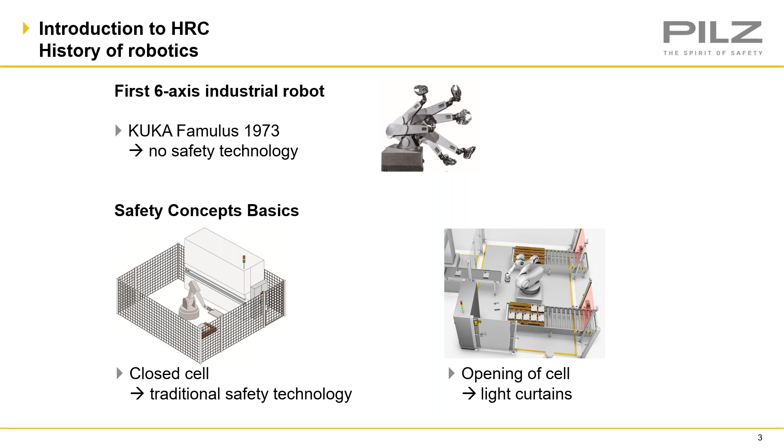So what is human-robot collaboration? The scenario where people and robots occupy the same working area and can come into contact with each other is the first thing which comes to mind. However, it's not the only definition of the term.

HRC covers many operating principles and methods, and Cobots can be used in a large number of different applications. So HRC is not one specific application. It does not describe a specific manufacturer. It can be any manufacturer and various operating principles or methods.

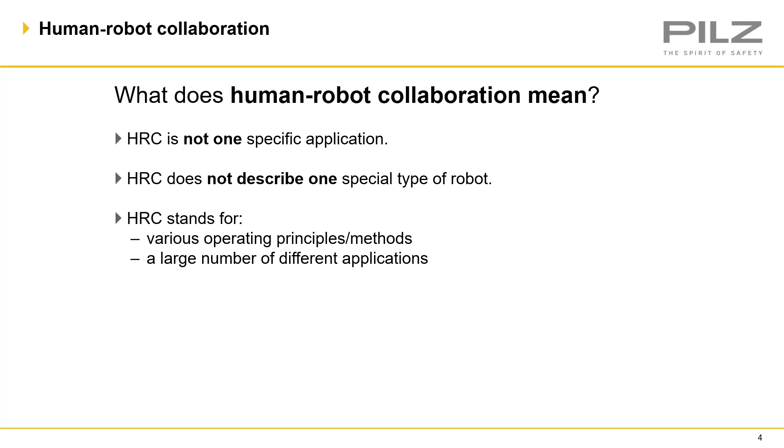So what is the meaning of Cobot? A Cobot is a robot capable of collaborative applications. You may be able to initially identify them as they look very different externally, as they're designed with no sharp edges or trapping points between the axis movements. And generally they're smaller in size due to only being practical in lower payload applications, and this is due to the force and pressure measurement allowances that we'll come on to later.

But it's inside the Cobot where the big differences are. They have inbuilt sensing capabilities and intelligent safety functions, and this is how they detect these collisions.

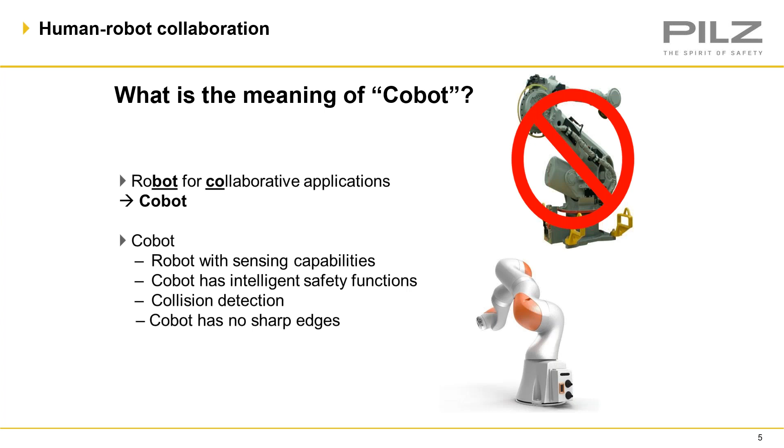So when deploying a Cobot into an industrial application, you are making or completing a machine and therefore required to follow the UKCA or CE conformity assessment procedure, depending on which application you're doing. So to do this, you must comply with the HSRs, and as per the Machinery Directive or the Supply Machinery Safety Regs as of this year, you carry out a 12100 machinery-based risk assessment.

And for those that don't know, ISO 12100 is the only A standard within the pyramid of standards under the Machinery Directive or the Supply Machinery Safety Regs. So within this, you will need to apply the C standard as well, 10218 Part 2.

And using Annex A of this standard, there's a list of common hazards. But also particular attention needs to be given to Chapter 5 and the use of the 4 methods, and we'll cover this in more detail later in the presentation.

But as well as the C standard, there's other applicable B standards. So to name a few, you'll be looking at 13849 Part 1 for safe parts of the control system, 13855 positioning of safeguards, 13857 for safety distances and the calculations within this.

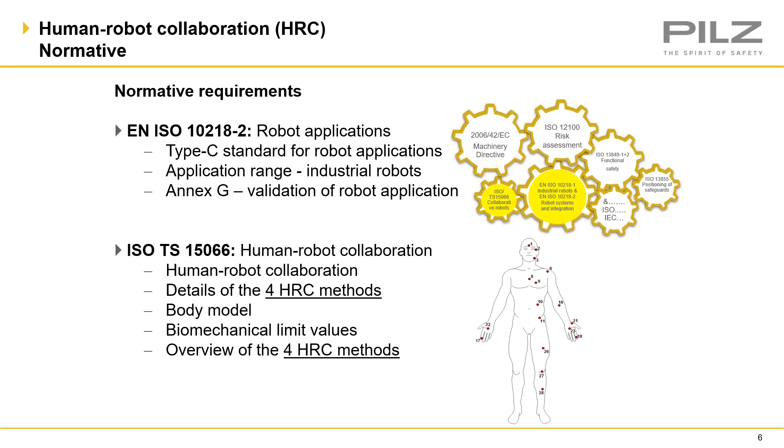When you're validating the application, you'll be using 13849 Part 2, and in conjunction again with 10218 Part 2. And Annex G of 10218 contains a list of more than 200 points to give guidance on the requirements for the validation of the application.

So there was a technical specification, TS 15066, created for HRC. And although it is only a technical specification and not a standard, it follows the usual format of a standard, and it's split into 7 sections.

The format would be 1.1, the scope, so this is detailing what it covers. Section 2 will be reference to other standards or norms, as they're called, and in this, it references 10218 Part 2.

Section 3 is your index or glossary, so it gives you definitions of the terms that might be in there if you need any clarification on them.

Sections 4 and 5, these are the technical details for design and hazard identification, and also other requirements. So in this case, it will say that the performance level requirement is a minimum of PLD Cat 3 for the safe-rated parts of the control system.

Section 6 will be verification and validation requirements, and 7 is just information for use. The annexes in the back will contain informative information, so that's information to help you, or norms or normatives, which are must follow requirements.

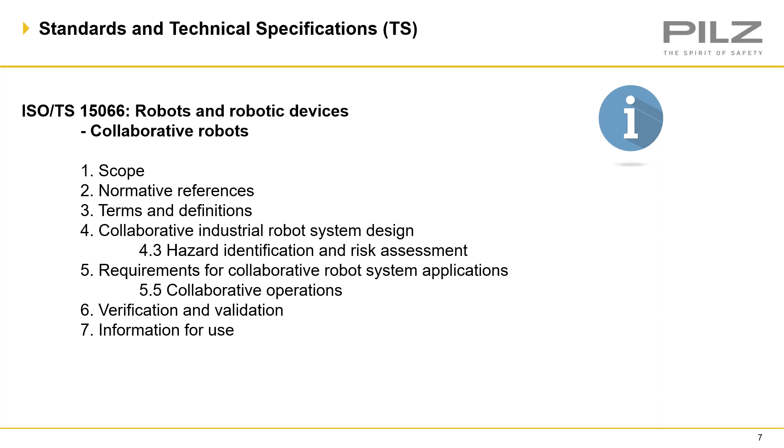Within the standard, it defines a number of spatial parameters, as listed on the slide. Starting with maximum space, this is the unlimited movement of the robot—the maximum reach of the robot and end effector complete with the workpiece. It's the full reach at its maximum extension without any limiting measures.

Then we move on to restricted space. This is where the robot is permitted to move following the implementation of limits, which may be physical mechanical stops, electrical control devices, or, more common today with advanced robots, safety rated software. Guarding is actually allowed to be classed as a restricted spatial limit, but it's not common, and we'll cover more detail on that in the next slide.

Then there's the operating space. This is where the robot will maneuver to perform the task it's being designed and deployed to execute. It is not, as the previous point, restricted to this space—it can go out of it, but this is just where it's expected to operate by design.

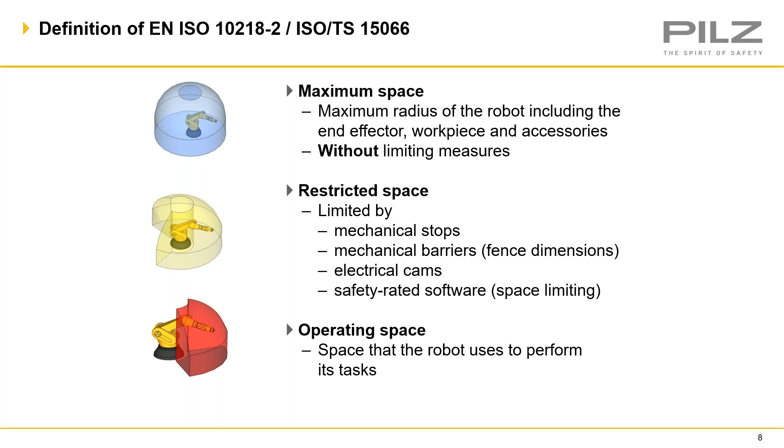So the safeguarded area. The safeguarded area is ideally outside of the restricted space to avoid the robot coming into contact with the guards. But if the guard is deemed to form part of the spatial limit, then it will need to comply with section 5.4.3 of 10218 Part 2. The results of the risk assessment should be used to determine the requirements for guard design, strength, and deflection.

There are 4 notes in this section, and particularly relevant is note 4, where it says using a perimeter guard as a limiting device is normally practical only when robots cannot cause hazardous deformations to the guard. So basically, the guard must be capable of withstanding the force of the robot. When you think about some of the forces generated by these robots, it would need to be a pretty strong guard—so it's probably not practical to do this.

And finally, the collaborative space. This is within the operating space, and this is where human and robot contact can occur, where both will interact and work together to carry out the tasks it's been designed for. This is also where the validation tests will be performed, which we'll cover later in the broadcast.

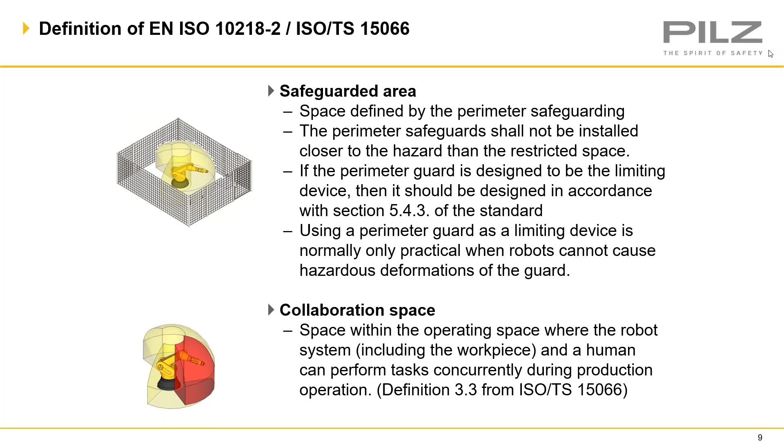So 10218. Just to note to start with, 10218 Part 1 is not something we're going to be concerned with so much today—that's for the robot itself, and is therefore designed for the manufacturer, so the Kukas, Fanucs, Yaskawas of this world. What we're going to be looking at is Part 2, where the responsibility for the complete machine application lies, and it's generally for the integrators.

Particular attention should be given to Chapter 5 for the required performance level, as mentioned before. Some of the other key information is from 5.2.2, for instance, where it says the minimum requirements of the safety-related parts of the control system is PLd Cat 3. But 5.2.3 says this isn't limiting—a higher performance level could be required if the risk assessment deems it necessary, so you may need PLe. Also, through risk assessment, you may be able to justify that a lower performance level is required, or that you can't meet the requirements, especially if the robot can't meet this.

I know some of the early cobots released only achieved PLd Cat 2 for collision detection, but again, you've got to justify this and document it in your risk assessment. Section 5.11 also discusses collaborative robots and the use of the 4 methods, but it doesn't give guidance on force and pressure limits, and it makes reference to 15066. We'll come on to the 4 collaborative methods in more detail.

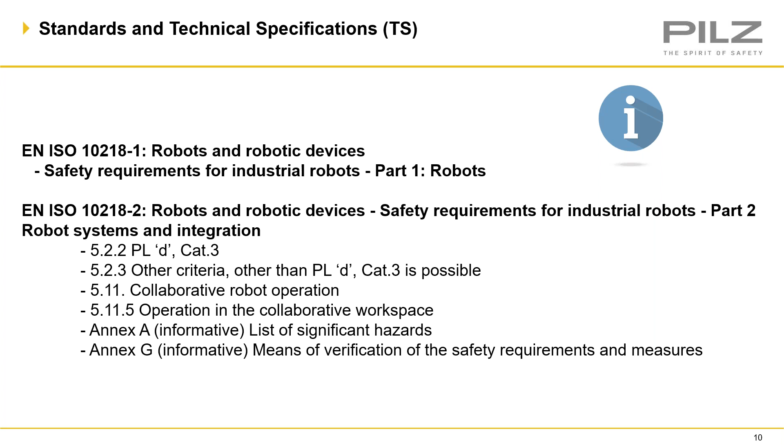For those that aren't aware of how we get to performance levels, this is the risk graph from 13849. If you follow the lines down, you'll see where we get to D. So to be at D, you must have selected S2, which is a severe injury.

And these are mostly going to occur if you come into contact with a robot. So if you've selected a severe injury, you only need to say there's either a high frequency of exposure or the possibility of avoidance is scarcely possible, then you will end up at D. And as we said previously, if you deem both to be the case, then you will end up at E. So it's not out the realms of possibility that that's going to be the case.

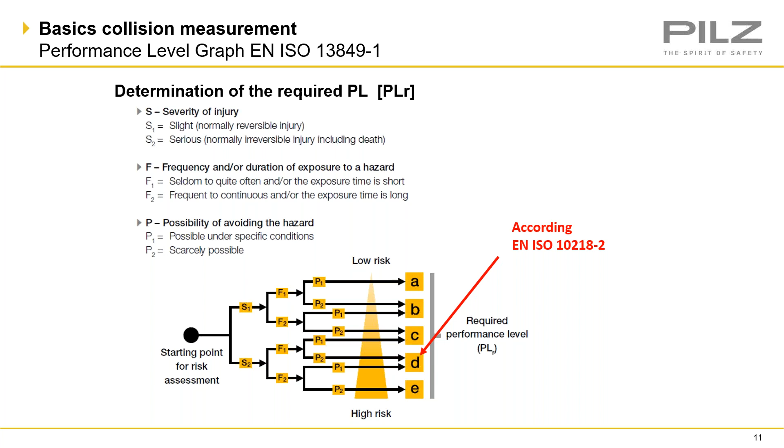So that's the performance level bit. The category of the architecture, as you can see here, we have 4 categories, 1, 2, 3, and 4, and we're going to be looking at Cat 3. So this gives you a single fault tolerance, meaning a single fault cannot lead to the loss of the safety function. So it offers you a dual channel architecture, which gives you redundancy.

Some may argue that you can achieve PLD with Cat 2 architecture, and in some ways that does give you redundancy, but it only actually happens following the detection of a fault and a secondary reaction. So this will mean there'll be slower reaction times associated with parts of the control system.

So if you were to use this in any application, even using electrosensitive protective equipment, light curtains, as we've got in our diagram, then to truly calculate the stopping time of the machine, you would need to introduce the fault so that the system can detect it, process that detection, and then send out the reaction to stop the upstream contactor or the secondary device which would be used to kill the power. And that would have to be used in the calculation in 13855. So the formula S equals K times T plus C, and that would be your T part of that.

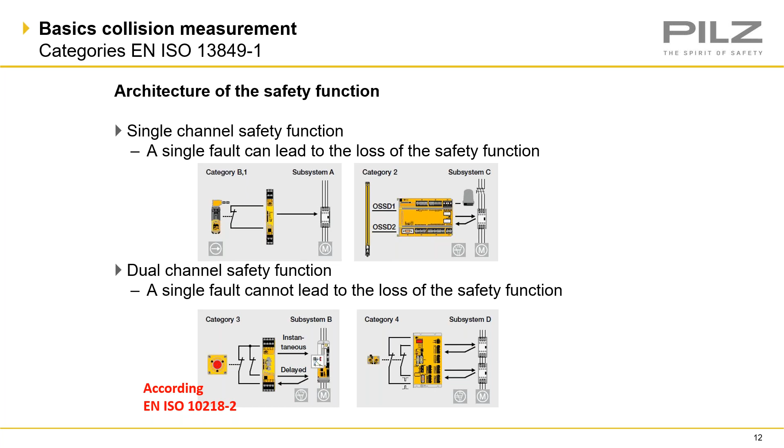As we said, we'll come on to the 4 methods as well. Section 5.5 of TS 15066 discusses the use of the 4 methods for robots to work in collaboration with humans. These are referred to as operations in the TS, but they're also known as methods, so you may hear both terms being used. But the first 3 are traditional in robot applications. It's only method 4 that's really new.

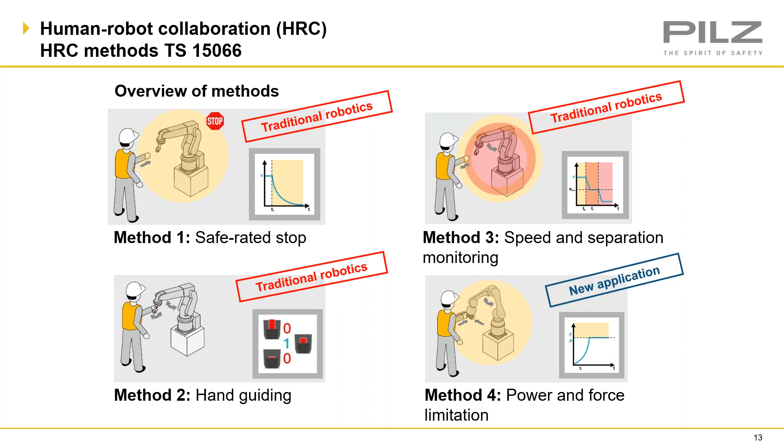So if we cover these methods, number 1, method 1 is safety rated monitored stop. This is where there's no contact allowed with the moving robot, and this is generally achieved by guarding or protective devices. The robot must have come to a safe stop before entry is allowed, and it can be any stop category, 0, 1, or 2. They're all possible, but just depends on the application.

This stop would usually be triggered by guarding or scanners or light curtains, but the scanners or radar may also be used to monitor the collaborative space for occupancy detection, because we need to make sure that it's not going to restart.

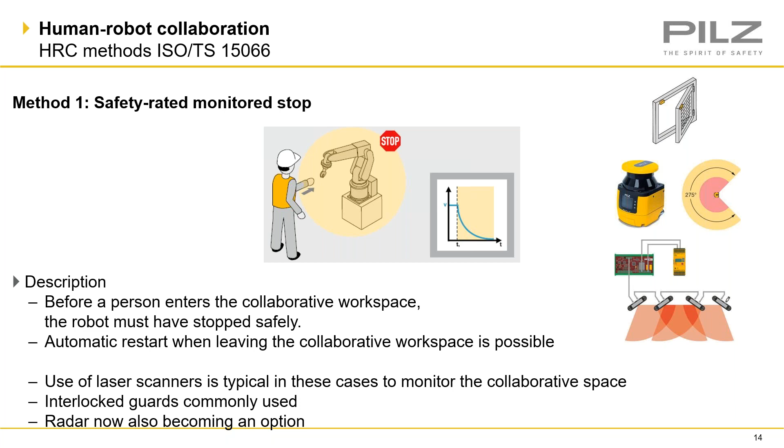Method 2 is hand guiding. So following that safe stop that we've achieved in method 1, you may control the robot by hand, and this would be done by disengaging the brakes. But to disengage the brakes, really, it needs to be done from a 3-position switch, and the use of the 3-position switch is key to allowing the robot to operate through the hand guiding. It should be part of the robot controller. This 3-position, as you can see, is the middle position where it activates it, so if you let go or grip tighter, it won't operate, won't give the OK signal.

So some of the requirements that need to be considered as well, again, the performance level. We've got to think about PLD Cat 3, and safe speed limiting maybe, and the other safety functions of the robot.

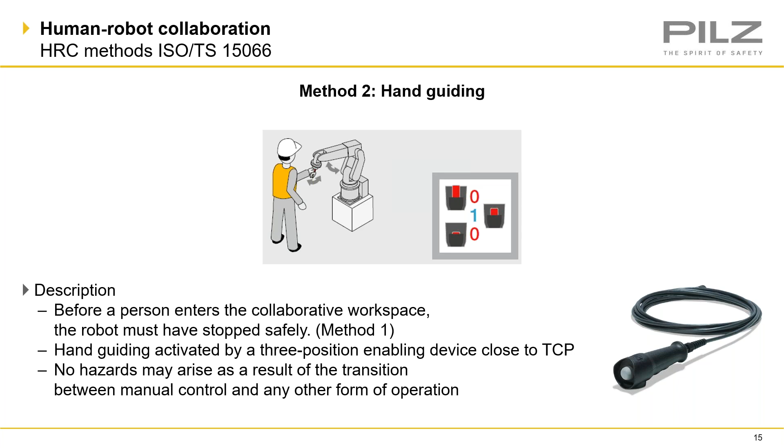Method 3 is the speed and separation. So again, still no contact with a moving robot, but it may be that it's unguarded and the human approach is detected by sensing technology to slow the robot down, maybe in the amber zone. And when you get too close and you enter the red zone, then the stop is required. So you may be looking at scanners, radar, or something like that to carry out these requirements, but only if those devices will achieve performance level D category 3.

And you then have to consider your stop performance, and so you time these stops to make sure that you still can't reach the robot and create an unsafe condition.

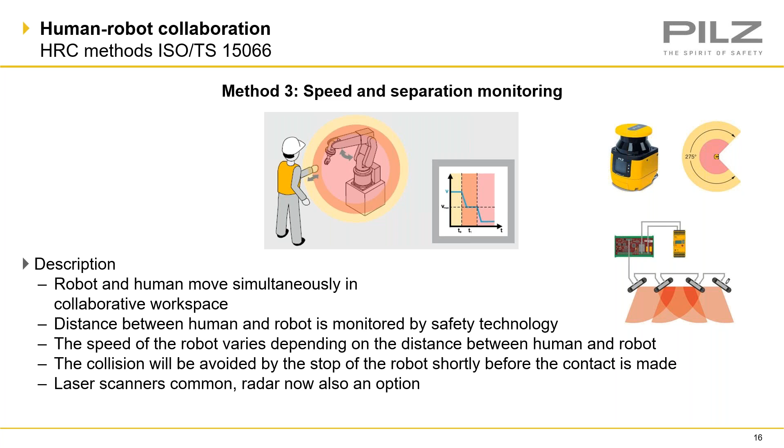So method 4, the new method. It's the first time it's been allowed for the operator and the robot to inhabit the same working space, and contact between them whilst performing duties or performing this task together.

So we have to consider intentional but also unintentional contact. And there are stated thresholds for both force and pressure limits that are detailed in 15066, depending on the body contact region. And these must be validated, and the validation must be performed to prove there's no injuries that are going to occur in this mode, but also documented as well, so there's traceability.

And we cover these 4 methods, and they're not all mutually exclusive, so you don't have to use one or the other. For some method 4 applications where you want to have true interaction with the robot, it might be that due to the speeds required to meet the thresholds in the force and pressure requirements, you can't go fast enough to get your throughput for the application. So it might be like a method 3, method 4 collaboration. So it may be working at full speed, but you detect somebody coming into an area, and then you reduce down to a speed that will allow you to realize these force and pressure limits. So there's ways in which you can get to having collaborative applications that aren't just so black and white.

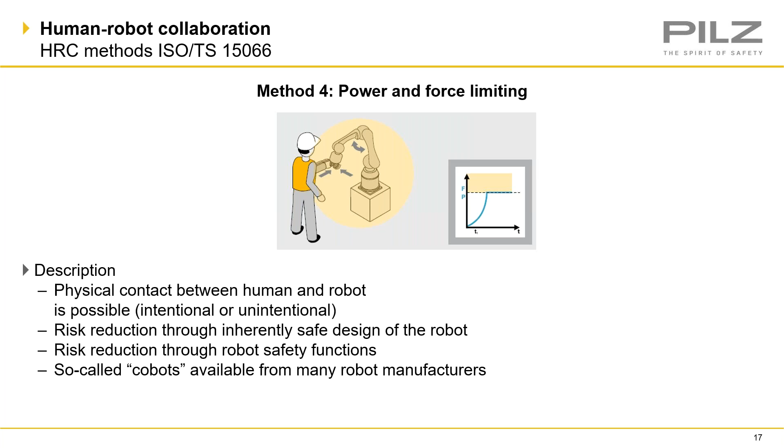So for a safe robot application, there's a special path. And why do we need a special path? Well, all robot applications do, but the validation requirements change, especially with HRC applications.

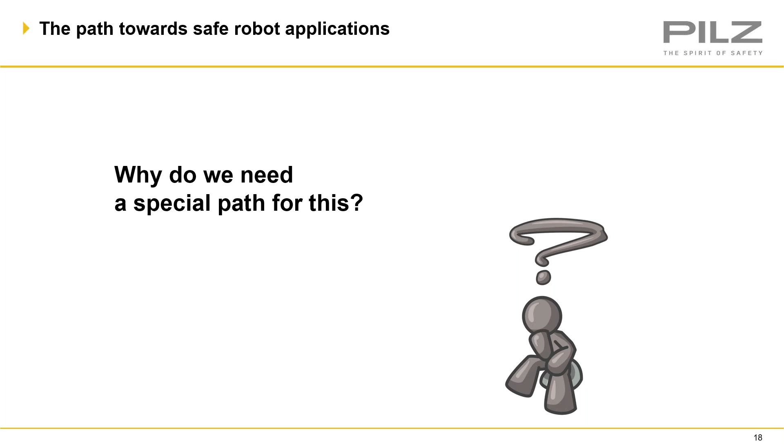As with all machinery installations, you must demonstrate conformity to the law, whether that's the EU directives or the UK regulations. You'll most commonly do this via the application of harmonised, or now under UKCA, designated standards. These standards are guidelines, and it's not mandatory to follow them. However, a lot of the working out has been done for you. They give you guidance, and they give you a presumption of conformity to the directive or regulation.

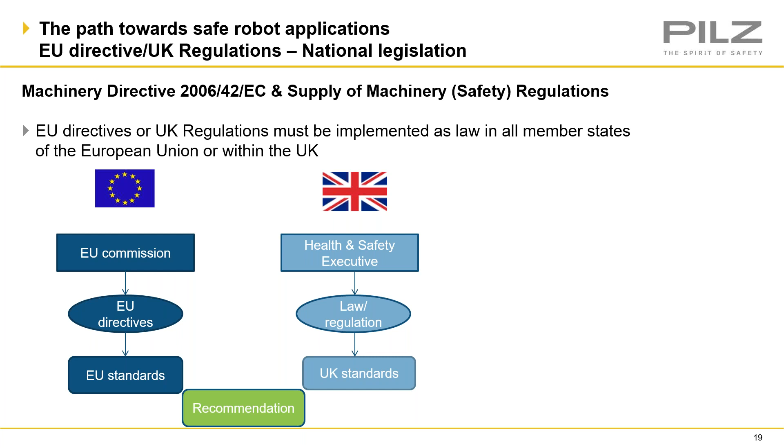And if you don't follow them, you have to demonstrate why what you have done is as good, if not better, and all the working out to prove that. So for me, it's kind of just common sense to follow the standards. Somebody else has already done that work for you.

And whether you're UKCA marking or CE marking your final application, the process at the minute as we stand is currently the same. There's some terminology changes that you have to consider, but things like the EHSRs, the standard numbers are the same. So it's just generally down to terminology changes at the moment.

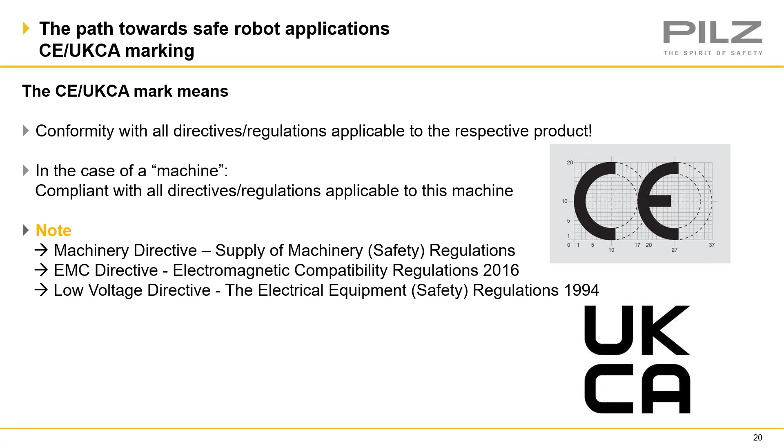So, according to the Machinery Directive or Supply Machinery Safety Regs, a robot is classed as a partly completed machine. This is due to the actual definition of a machine being that it's an assembly of parts, at least one of which moves, which is fitted or intended to be fitted with a drive to perform a specific function. And out of the box, a robot doesn't meet these requirements, as it will not perform a specific task until it's programmed and has an end effector.

And this is why you won't see a CE or UKCA marked robot directly from a manufacturer. This is the integrator will do this.

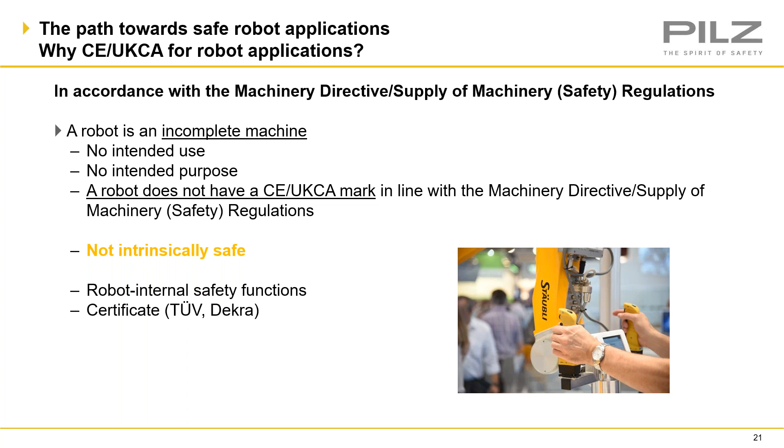So the integrator is concerned with 10218 Part 2 and the complete machine, as we previously mentioned. And this is where they will give it an intended purpose or an intended use, and therefore effectively become the manufacturer. And the manufacturer will hold the responsibility for the safety for the UKCA or CE marking conformity assessment procedure. And within that, producing all the supporting documentation and issuing the CE plate and signing the declaration of conformity.

The only time an integrator wouldn't do this is they appoint somebody else as an authorised representative to carry out these duties. And they will be doing the assessments, etc. Co-sign a declaration of conformity under mandate from the integrator and supplying the CE plate then, featuring both logos.

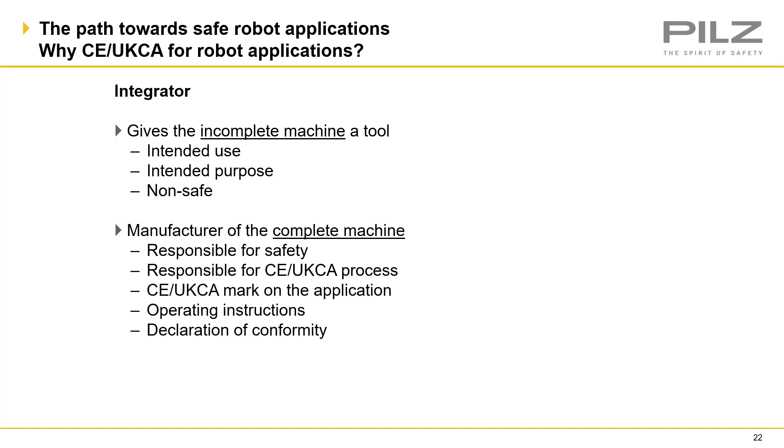Some of you that may have used us for services before may be familiar with the Pilz machinery life cycle. Our normal life cycle would start with a risk assessment before producing a safety concept, and this serves as a basis for the safe design. And then we go on to the safe design, the validation, the verification, etc.

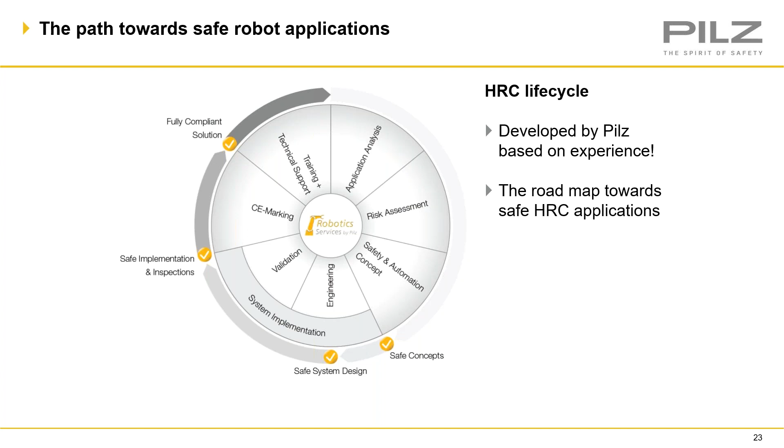But what are the differences with an HRC application? Well, we introduced the application analysis phase, and this is to be done even before purchasing the Cobot, and it should be at the conception stage of the project.

And you want to consider things such as, is it necessary that the application is collaborative? What is the requirement of the application? And what are the materials being handled?

Because we've worked on applications in the past where doing this analysis too late meant that it wasn't possible to make, or financially viable to make, the application collaborative. And it wasn't to do with anything with the programming or any of that. It was just to do with safe design.

There were sharp edges. The robot could have been placed in a different orientation. How it handled the workpiece could have been slightly different. And if it's identified early enough, they could have all been designed out or just designed differently. But it was too far down the line and was not financially viable, so they ended up going with a method 3 application.

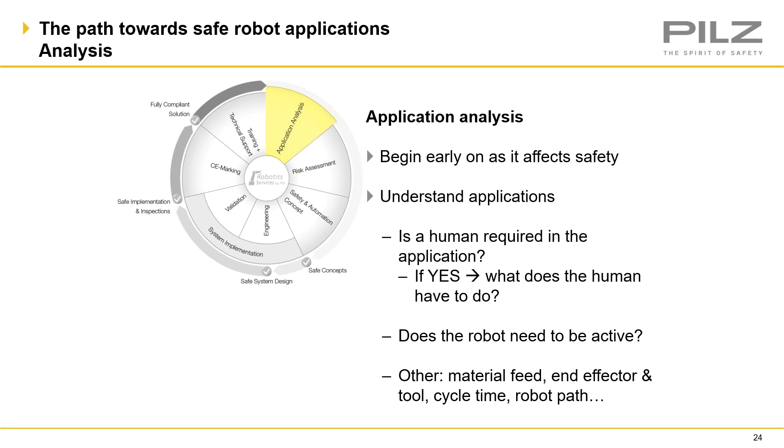So following the analysis, we do a risk assessment, and this is always the basis for any CE marking or any application where you're installing machinery. It's got to be driven by your risk assessment and following the standard 12100. And you'll do the normal things such as looking at the limits, tools, variants, there's operating modes, what's its intended use, any foreseeable misuse, and other activities.

But also think, as with the application I just mentioned, the workpiece has an influence on the hazards. And this is something that needs to be considered early. So if there are sharp or hard edges, how it needs to be twisted or turned or transferred from one place to another, these need to be considered.

But with HRC, even the path that the robot moves and the axis rotations can cause hazards. So you may want to think about making sure that if it's placed on a worktop or near a floor, that there aren't any trapping points between the floor or another object and the axis movements of the robot, and you may move it in a slightly different way, and it will just remove these hazards altogether.

But consideration has to be given as well, and documented, for the other collision types and expected body areas to be involved. You also have to think about an unexpected startup, because when the robot's standing still and people are in there, it's always got to be in a safe stop, but we need to know that it's not going to restart, especially if we're going to be working so closely with the robot in these collaborative applications.

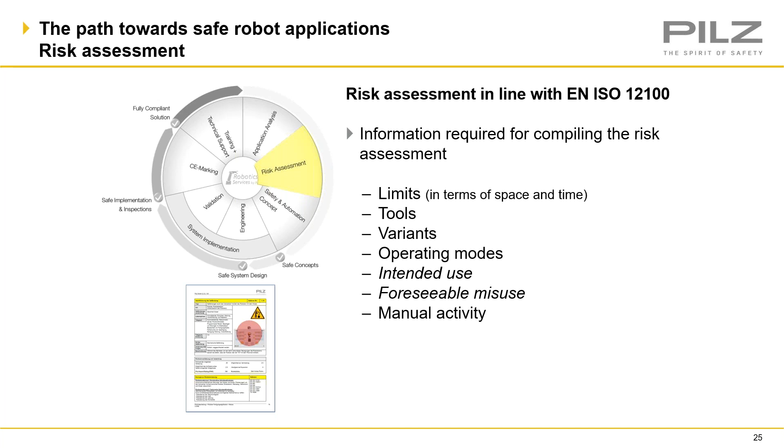So following the analysis and the risk assessment, we'll move on to the safety concept. As I said, this will serve, if we produce them as Pilz, as a product neutral basis design. And we'll utilise the hierarchy of control, the three-step method for the risk reduction. But we'll also consider things such as safe distances, any applicable standards, safety-related control functions, sequencing, etc. And this is how we will reduce these risks down to the manageable risk levels or acceptable risk levels.

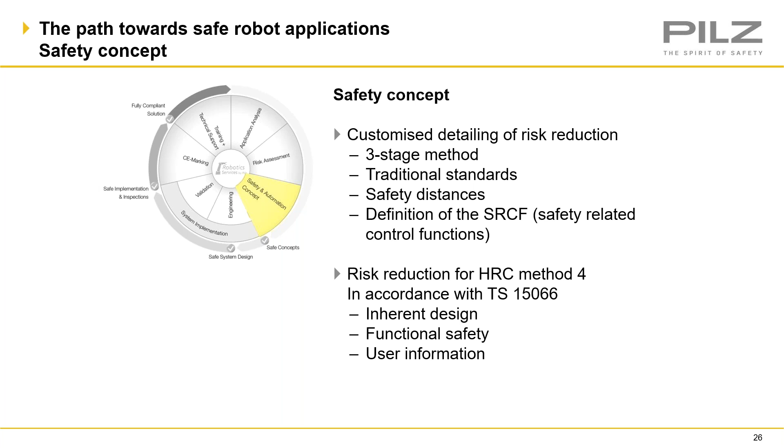So for those that don't know the three-step process, the first step, and again, this isn't just for robotics, it's for any application, is inherent safe design. So can we design these hazards out? As we said before, taking out sharp edges, moving the robot in a specific way. There can be lots of different things that we can do.

Then when we've gone through that, for other parts, we'll look at the functional safety and safeguarding. So do we guard areas? Do we use safety related controllers? Do we use scanners? But this is also where the safety rated software within the robot and the sensing capabilities and things like that can be used.

And finally, and only when we've exhausted these first two, can we go down the route of training, procedure, PPE, and user information. But also in this, for collaborative applications, you have to give considerations to removing lost work pieces in the operating manual and other instructions that you may need to interact with the machine.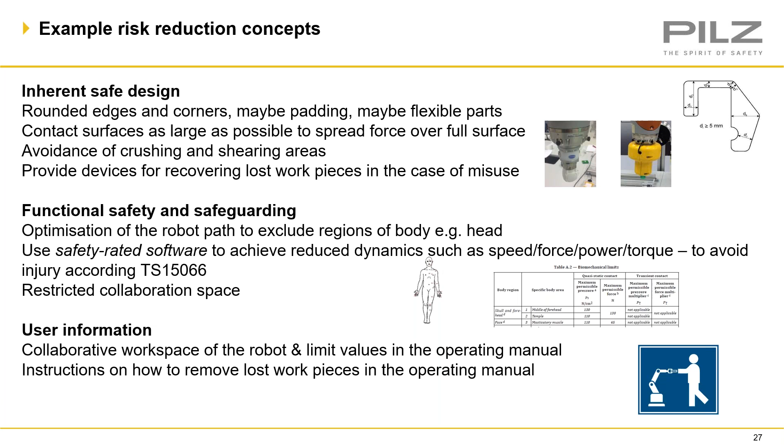So following all that, then we'll come on to the engineering. So using the information gathered in the 4 previous steps, we'll do engineering design, installation, integration of the safe solution.

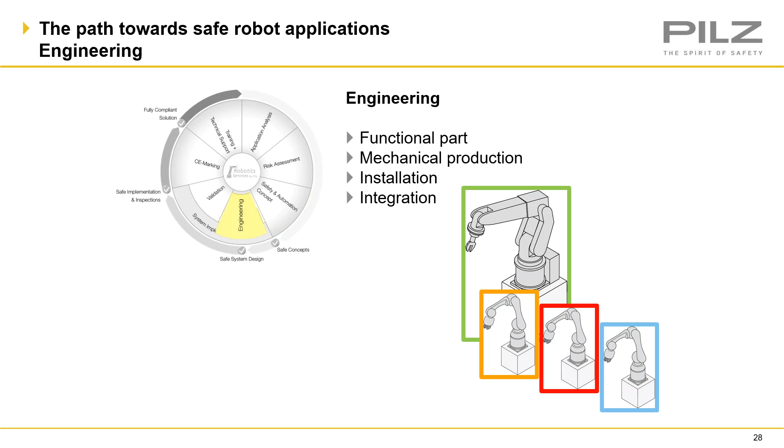And now the bit where it really changes and gets interesting for HRC: validation. So there's new processes and requirements introduced for HRC applications. As we said, we've never previously allowed humans to come into direct contact or interact with a moving robot. And as it's never happened before, it's never been considered before.

So there was new requirements developed to validate your application. You must simulate these collisions and document the findings. And you must also cover both force and pressure. And this must be done to validate, as we say, the application.

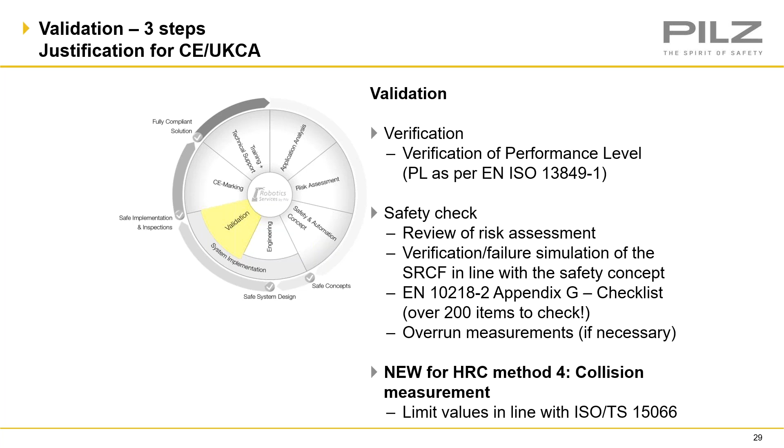So why must we do collision analysis?

Contrary to what some people believe, a cobot is not safe out of the box. Yes, they have force and collision limits in the fail-safe section of the robot control system, but these cannot solely be relied upon to ensure no harm comes to an operative, as it doesn't account for dynamics. When a collision occurs, the robot will realize it has come up against resistance and initially apply more pressure until it decides it needs to stop. So the force and pressure will increase momentarily. This reaction of increasing pressure, then deciding to stop and reducing it, all has to happen within half a second without exceeding the deemed limits, dependent on the body area, as per the body map.

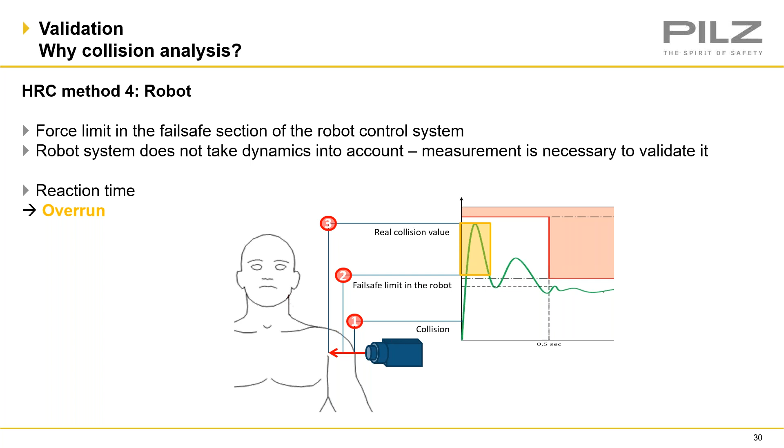Again, just to reiterate, you must document to prove these limits are not exceeded during this collision.

Without a risk assessment, it's not possible to really do the measurements because we have to document them, and all collision scenarios should be listed within your risk assessment so the collisions can and will be replicated. To replicate specific collisions, a device capable of measuring force and pressure is required, and it must also be capable of representing different areas of the human body.

If you look at the diagram, we'll talk about how you would replicate a collision. Point A is where the movement starts, and point C is where it's programmed to finish. Point B, in the middle, is where the load cell needs to be placed to stop the robot mid-movement and accurately replicate a collision.

This must be documented as well to show and make it reproducible, so we can prove afterwards that we've done these calculations. But then there's a couple of different collision types, and these are the things we have to consider.

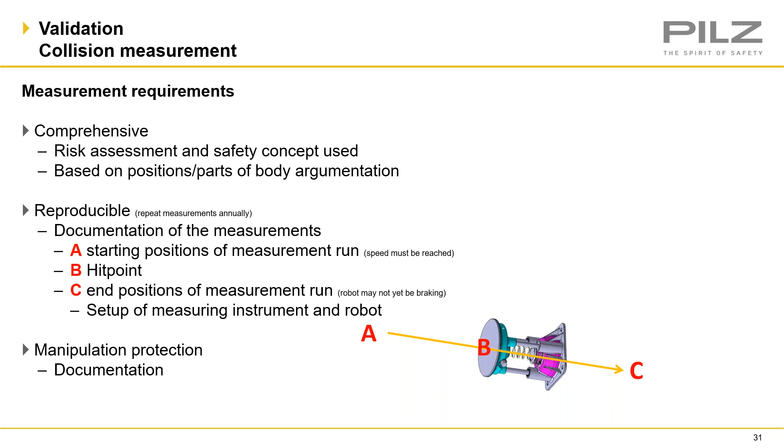The first one we'll cover is transient collision. This is where the person can recoil or retract if contacted by the robot - you can move away, whether knocked away or by reaction. But the key point is that they're not clamped; there's nothing trapping them.

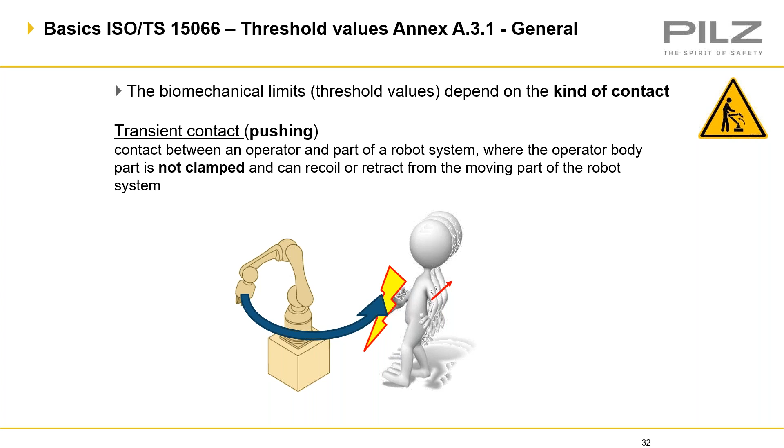Whereas the second one is the quasi-static collision, where you are clamped between a static or another moving part of the robot. We'll come on to the body map in a minute, and you'll see there's different values for transient or quasi-static collisions. But again, you have to consider both force and pressure for these types of collisions.

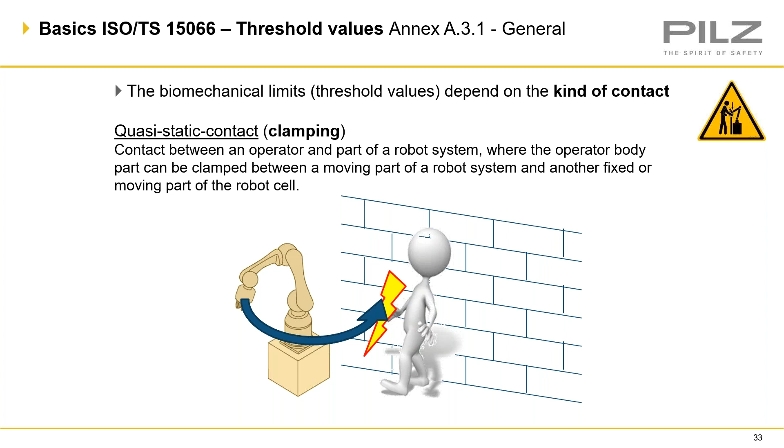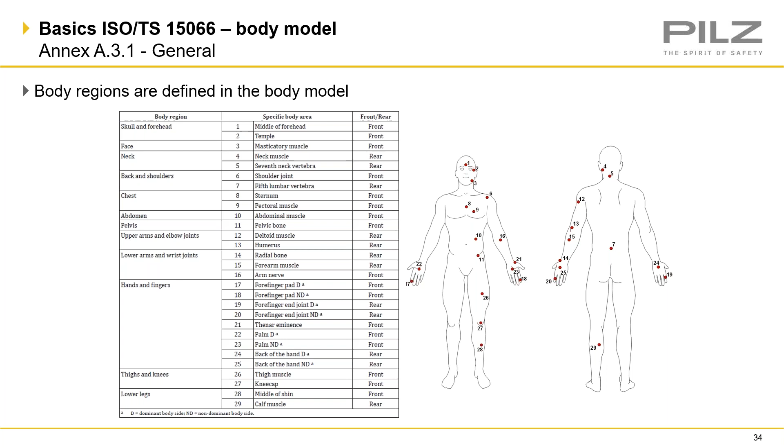And I understand they were derived by getting people, probably students looking for beer money, and just poking and prodding them until they said it hurt. Then these values were recorded.

Then they went on to define the specific spring constants for particular parts of the body when performing the tests. The spring constants represent the flexibility of the body region, based on the sensitivity or the fleshier or harder parts of the body, as we know we've got all over. But it's very important that the correct spring constant is used, because if not, it will cause incorrect test results. And we've got to document these again - it's all down to the documentation.

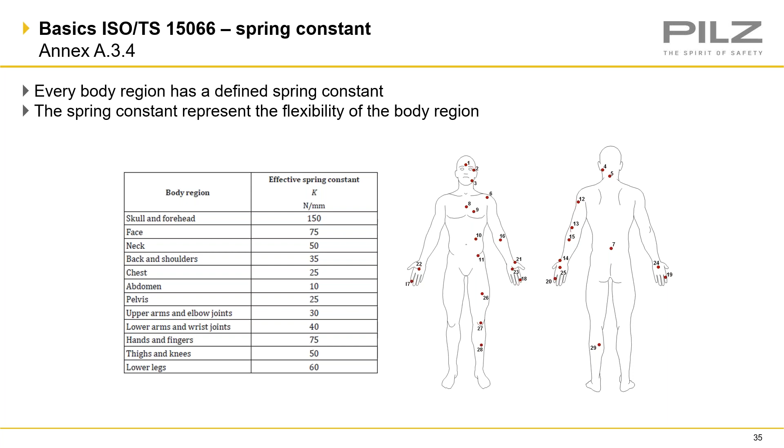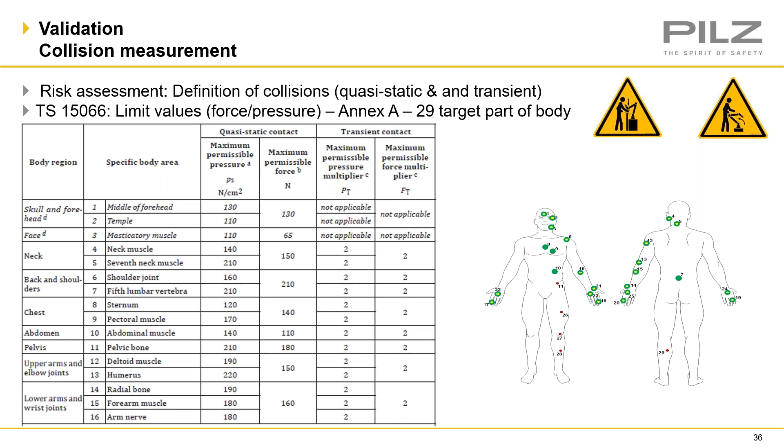So collision measurements are not there just to define how fast you can move your robot. It also proves that you have considered and documented, as we discussed earlier. The documentation will allow you to reproduce these collisions, either in case of an accident or periodically, to prove the values haven't changed.

And the changes could be due to modifications in the application, or materials or workpieces being used, or wear, mechanical wear in the components. So I suppose it's much like with light curtains, where HSG 180 states dependent on the performance level requirement, type 4 every 6 months, type 2 every 12 months. The frequency of the stop performance of the machine must be measured and proven to ensure the application is still safe.

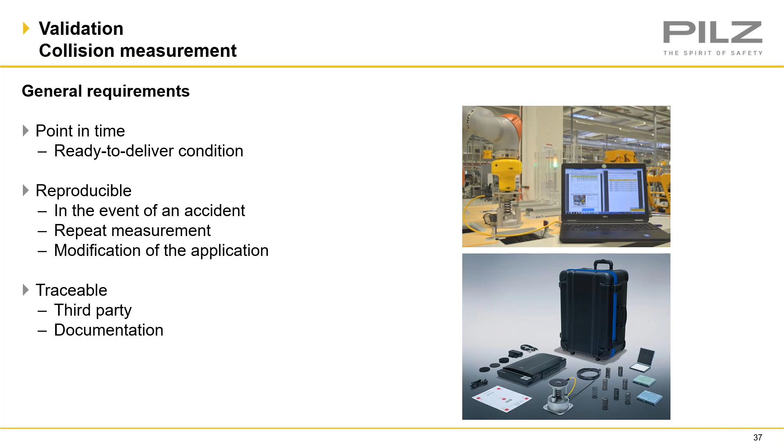So you may consider it from a similar angle, but it'll also give you traceability. So in case of an accident, you can prove what you've done and how you justify that you had all the best intentions of producing a safe application.

So there's plenty of kits out there. This is our Pilz kit, and we've developed it very early on. We've used it in many applications. But we can either come and deliver this service for you guys, or you can buy a kit yourself and get training on how to use it.

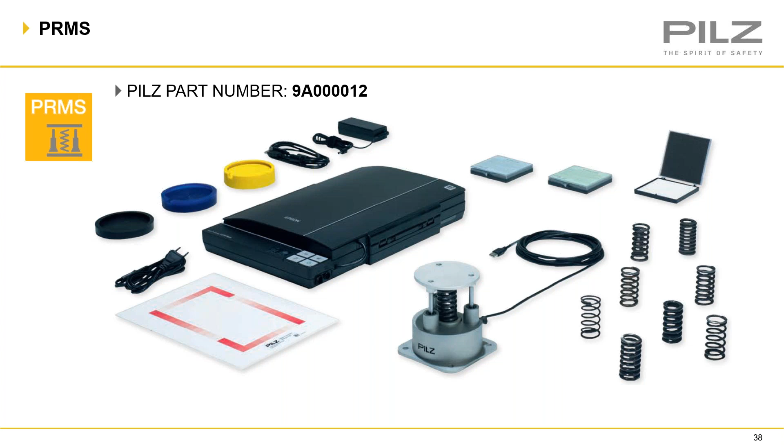So the kit basically is the PRMS measurement system, and this is what we use to do the force and pressure measurement. For the force measurement, you've got the measurement tool, the spring, and the evaluation software. We have one load cell and we change the spring constants. I know there's other kits out there where you have a load cell complete with a spring for each of the different values. Just different ways of going about it, really.

For the pressure measurement, there's a measurement film and a scanner to develop that, and a calibration sheet. And again, it all talks back to the evaluation software which has been developed.

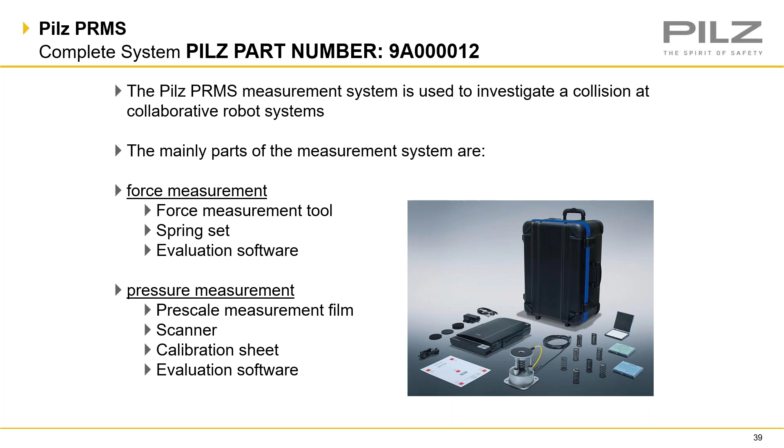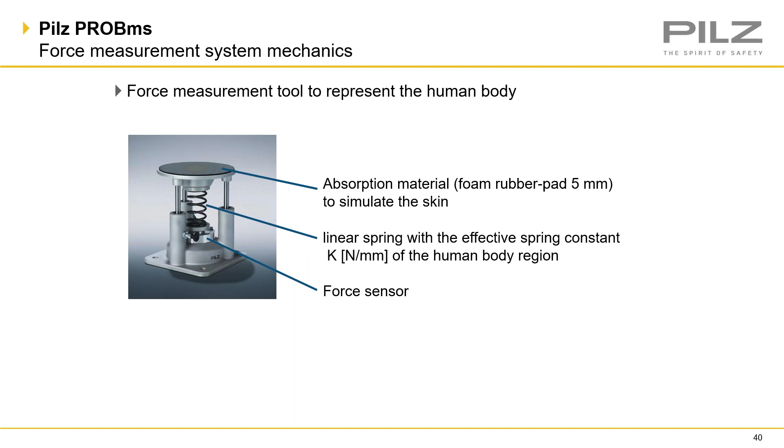So our force measurement tool is designed to represent the human body, and it has an absorption material on top. It's a foam rubber pad just to simulate skin. And as I said, we have one load cell with the interchangeable springs.

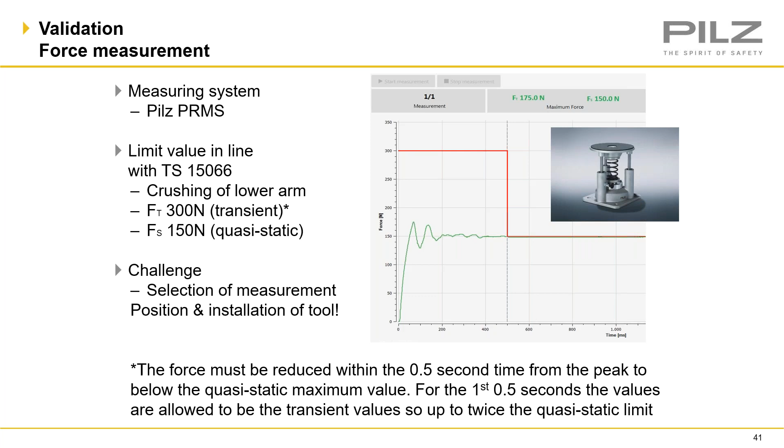The hardest part of probably setting these up is making sure you have the correct position and the correct tools to accurately replicate the collision. And you've got to have some experience to get this correct, and do a good bit of thinking about how you would do it.

So this next slide just shows you a pass or a fail. And although both of them come down below the limits eventually, the top one does it within that half a second time, as the bottom one doesn't. You can see that blue line that goes through, and it takes more than half a second to come down. So that would, in this case, be a fail as per the requirements of the standard.

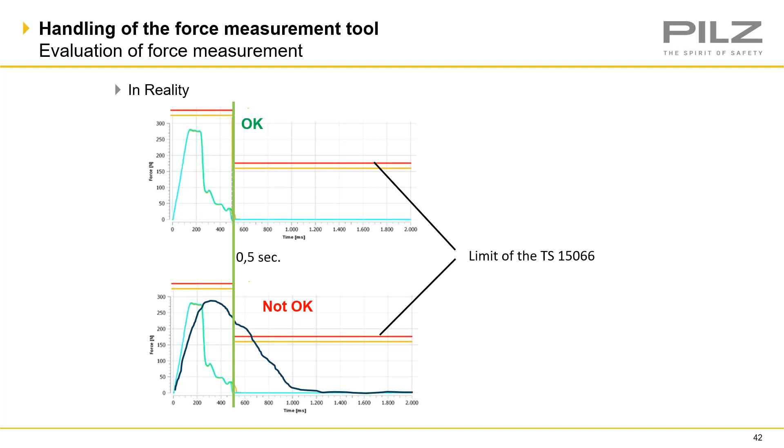So that's the force measurement. If we go on to the pressure, we have 3 different pads which we put on the top of the load cell, dependent on the different body parts. And these we place on there, and they're to replicate the harder or softer parts of the body.

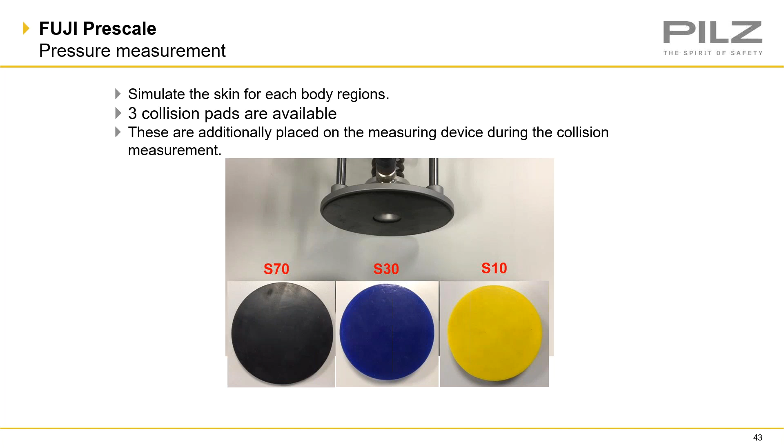So this illustrates the body map where they would be used. It looks at the A70 - the black one is probably on the harder parts of the body, whereas the yellow one is the fleshier part.

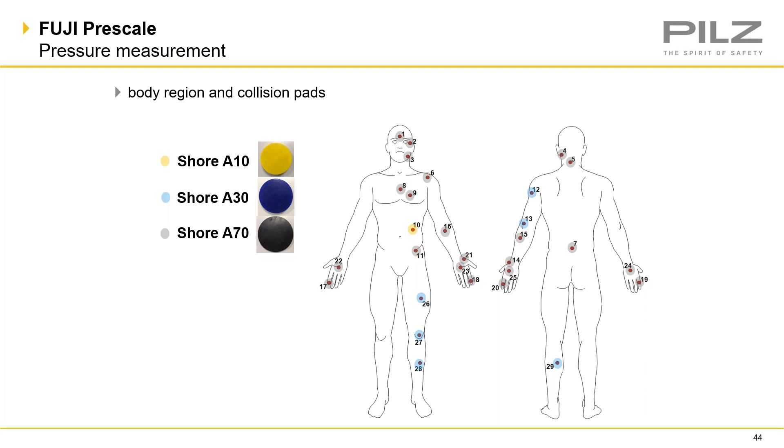And on to the last part of the measurement process, the photographic film. This photographic film will be placed on top of the collision pad. It's a 2-part piece which will allow the pressure to be measured and proven. So you'll see there's the A film and the C film. The A film is coated with a layer of micro encapsulated colour forming material, and the C film is the colour developing material. So as pressure is applied, very small capsules will burst, as you can see in the diagram.

It is very delicate, so you've got to be very cautious when placing this on, and you will get a different colour dependent upon the level of force, and this is what we will develop and measure against the chart. But if you aren't careful with the film and placing it on, even the smallest pressure can cause the capsules to burst.

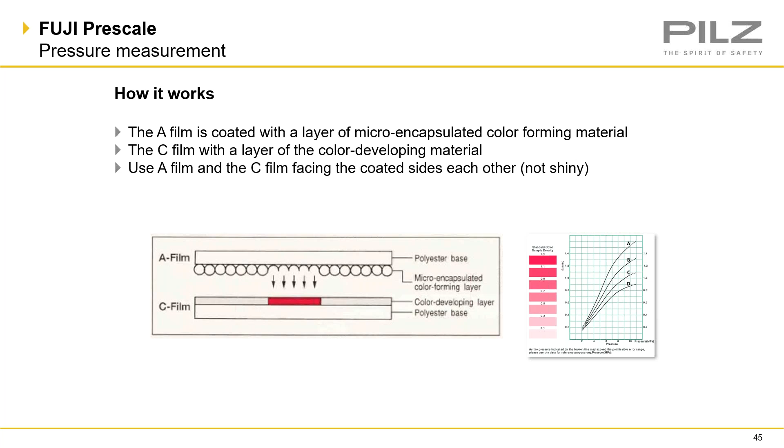So what does the film tell us? It's the pressure intensity, and this can be reduced by good design at the early stages—no sharp edges, rounded edges. As you notice with the design of a cobot, they are generally rounder than an industrial robot. The best way to explain it would be the principle of a drawing pin: apply pressure to the flat side and push it into a surface, you get low pressure against your thumb. Turn it round and apply the same pressure, and you'll pierce your thumb—that's a higher pressure. It's quite a simple concept, but these are things that should be considered in your design.

Again, as we said, the challenge. When carrying out pressure measurements, the areas to pay attention to are the delicacy of the film and its sensitivity to moisture. So don't apply pressure before the collision, because you may burst some of the cells before you even get to the point.

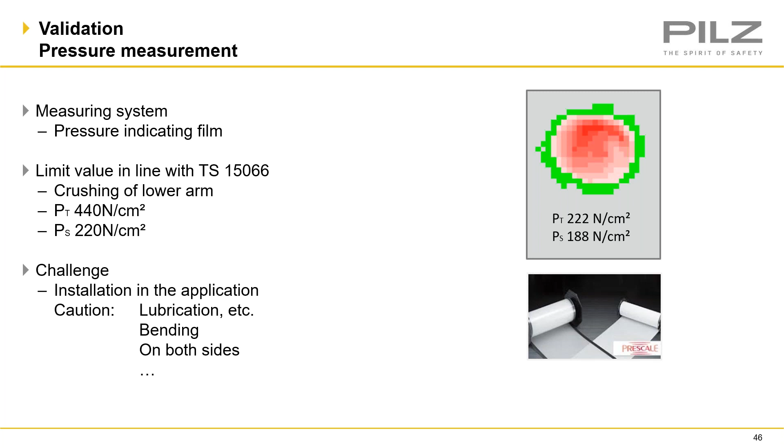Finally, to finalize the application, once all the analysis, assessments, concept developments, and designs are completed, the application engineered and installed, and all validation and verification completed, all that's left is to build a technical file. You put all this information into it, along with any other remaining specified requirements as detailed in either the machinery directive or Supply of Machinery (Safety) Regulations. Produce and sign the declaration of conformity, affix the CE or UKCA plate, and that process is complete.

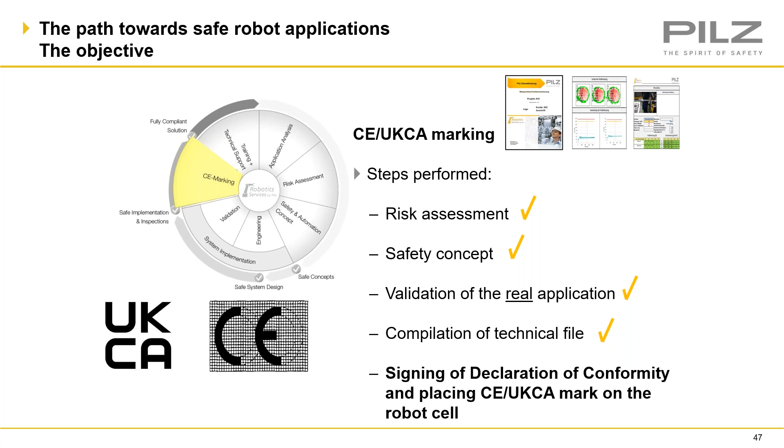Just quickly before we go—we touched on a couple of B standards during the presentation, but there are a few more common ones we'll run through. Especially 14118, which is the prevention of unexpected startup. When we spoke about interlocking devices before, that's 14119, and there's a technical report backing that up, which talks about series linking of potential-free contacts and probability of fault masking, giving guidance on that.

It's pertinent to say there's a table in the back, table 1, with guidance on the reduction of diagnostic coverage based on the probability of fault masking. So if you're doing robot applications, without any diagnostic coverage you revert to a category 1 architecture, maximum performance level C. That's a big consideration in robot applications, with the minimum requirement being PLD Cat 3.

14120 covers guards. Again, we went through 13849 parts 1 and 2. You've got to look at e-stops, two-hand control devices, minimum gaps, and pressure sensitive protective devices in 13856, hydraulics, pneumatics, and all that. Then 61496, the electrosensitive protective equipment, light curtains—that changed to say type 2 devices as of 2015 no longer allow you to achieve performance level D; they were reduced to PLC. That's another consideration for robotic devices.